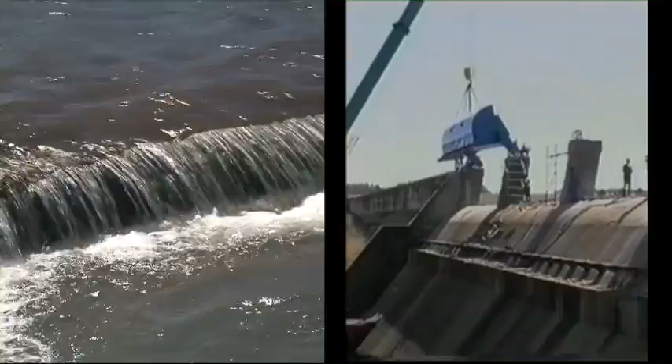I'm Peter Townshend, qualified civil engineer. I graduated in 1969 from the University of Natal. Most of my life has been spent with consulting engineers, doing a variety of work, a broad-based experience from civil and structural work. But more recently, over the last 20-25 years, I've had an interest and a passion for water and for water control. And through that passion, we've developed a range of automatic water control equipment, which is unique in the world and developed in this country.

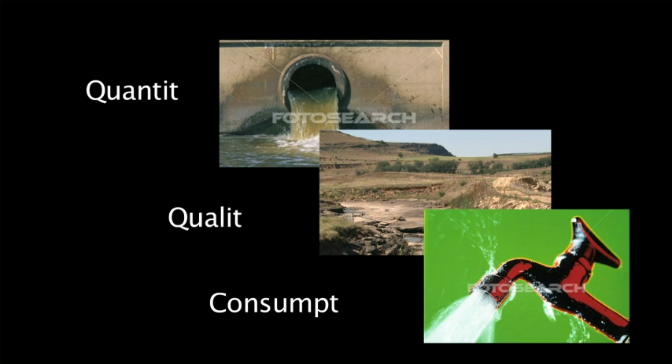Well, Johan, that's a very controversial subject because we are in a state of crisis, impending crisis, and it's only recently that the government and the public have realized this and are taking steps to it. Generally, I could refer to our water condition as the 3 Ks, being phonetical Ks: quality, quantity, and consumption are the 3 main areas that we need to focus on, and areas that we have crisis in this country. South Africa is not really a water-rich country.

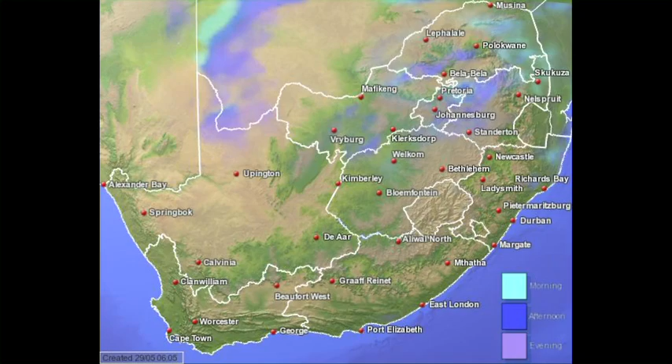We have an average rainfall of less than 500 millimeters across the country, and the water that we do have is usually in areas where we don't need it, and vice versa. So consequently, we are a country which has diverse rainfall going from west to east and to the coast, and we find that in the dense industrial areas where the demand is the highest is usually where we don't have sufficient water.

There's an increasing demand in South Africa for water. This is obviously due to increased population over the years, and the government's policy, correctly, is to try and provide clean, safe water to all the inhabitants of this country. That's going to be a large demand on our water resources. Then, in addition to that, there's an increased standard of living, and with that comes an increased water usage.

From the very rural people who have to go and fetch their water from the local stream, they are probably the most efficient water users, to the affluent environments that we have in urban areas where water can be irrigating on the lawns day and night. So with the increase in wealth and living conditions goes the increase in water consumption. In addition to that, our industrial and mining industry is increasing, and that consumes a considerable amount of water. And then food production.

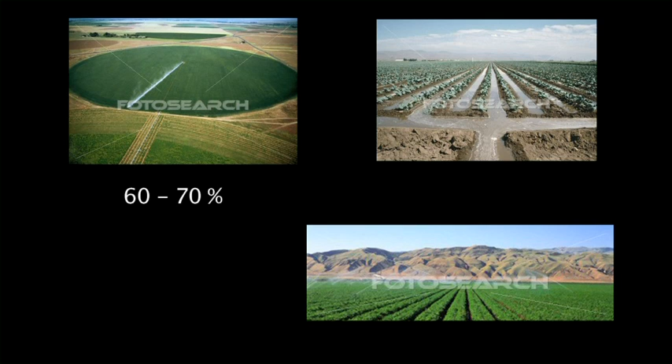About 60 to 70% of our water is used on irrigation, and that needs to be done to feed an increasing population. So our demand is increasing all the time, and in order to meet this demand in South Africa, our authorities need to look at a variety of mechanisms. One is to build more dams. It's not always possible to build dams where they're needed because of the water resources, but there are a number of dams that are being planned and are under construction, like the De Hoop Dam in the Limpopo province.

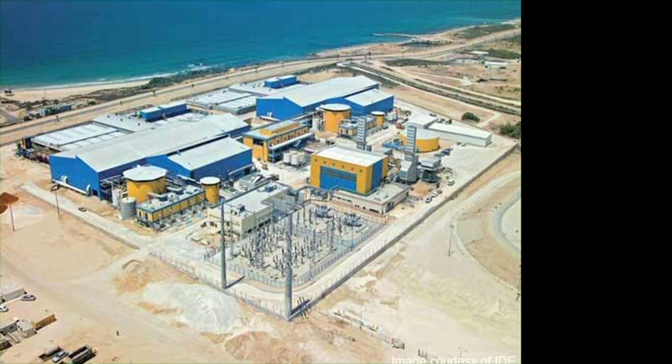Then there are interbasin transfers, such as from Lesotho into South Africa, which is also a cross-border utilization of water. And then more recently, and more importantly because it's needed, is desalination, where we will be looking at winning fresh water or potable water from the sea. All these mechanisms will come into play, but they are expensive. There is a price to pay for water. If you don't have water, you have to pay for it.

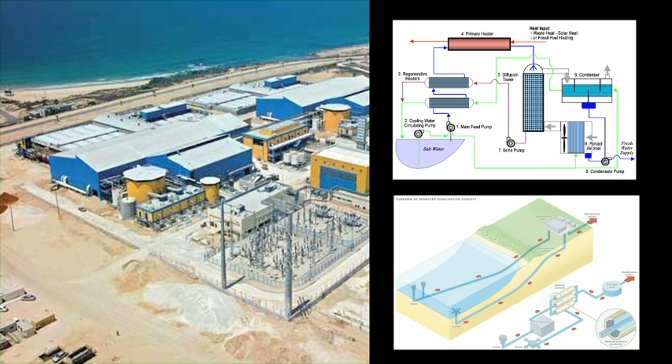Yes, there are figures that have been bandied about, ranging from 2 to 5 rand a cubic meter, depending on the size of the desalination plant. It is very energy consumptive, although the more recent technology of reverse osmosis does have a recovery of energy. But nevertheless, it is a costly exercise. It is a costly process to get water from the sea, more so than water from dams and from rivers.

What skews the public perception at the moment is up here in the Gauteng area and the Highveld area. We've had good rains this year, extremely good rains. And it's very hard for people to imagine that we're going to have a water shortage. However, in the Eastern Cape, Port Elizabeth area, they are in the grips of a dry period. Their municipal dams are only sitting just over a third full, when they should be substantially fuller than that. And so that is the problem in this country, that we have this difference in areas, some very wet, some very dry.

In this area, which is the hub of the industrial area of South Africa, it is predicted that we are running into a problem in that we are already exceeding the capacity of the Vaal River system. And phase 2 of Lesotho, which is scheduled for 9, maybe 10 years' time, will deliver more water. But in the interim, it's very possible that we will run short of water. So consequently, the focus has to move onto how to reuse wastewater, how to save water, and how to plug our losses as much as possible.

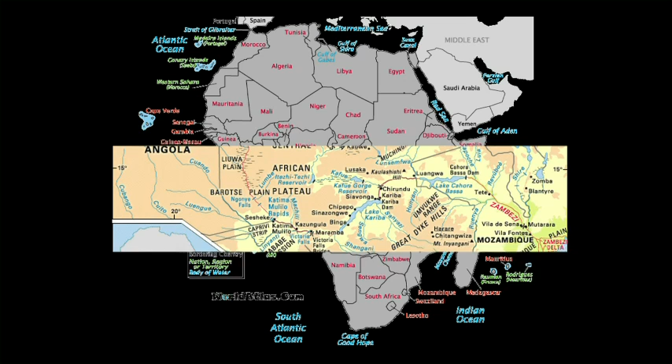But generally, it's accepted that maybe in 15 to 20 years' time, we could be short of water in this country. And we may have to look north to our northern countries where they will get more water. As far as global warming is concerned, the pundits, the climatologists, are predicting that we get less rain for areas south of the Zambezi and more rain for the areas north of that. And already there are indications in some of the rainfall and runoff figures over a long period of time that we are getting less rain, and in addition to that, more severe rainstorms. So the intensity of the rains is increasing, and with it come other problems associated with runoff and floods, etc.

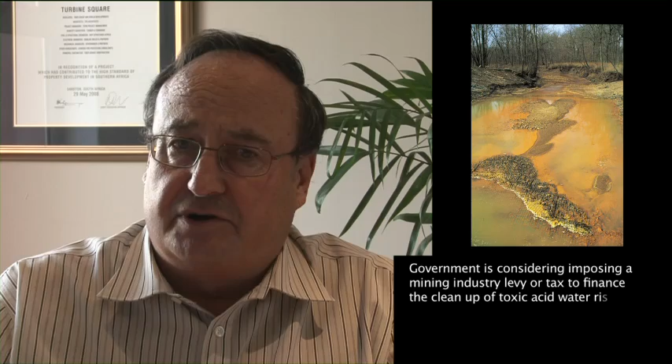The quality is constantly deteriorating, and there are essentially 3 sources or 4 sources that contribute to that. The one that is most topical at the moment is acid mine drainage, which we can talk about a little later. The other is the uncontrolled and unpoliced discharge by industry and mines into the watercourses. And this is basically due to a lack of adequate policing, which the Department of Water Affairs admit that you don't have enough people to

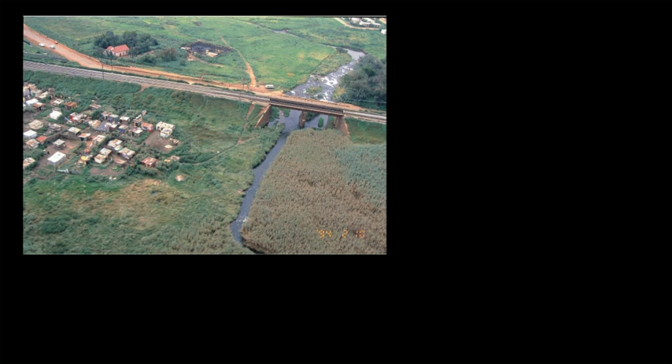police these discharges. And then the other one is informal squatter settlements, which naturally set themselves up near watercourses because that's where their water comes from. And with that, their waste and refuse and debris ends up in the watercourse, all adding to the deterioration of the water quality. And obviously, as we see blocked sewers, overflowing sewers running down the roads into the stormwater system and into the watercourses and our rivers.

So all that adds to the fact that our water quality is deteriorating and is beginning to have adverse effects not only on human health, which is probably the primary one, but also on industry. A lot of the rivers serve as the main source for irrigation, for edible crops or for deciduous fruit, and the fact that we may be using polluted water could actually jeopardize our overseas markets. It has been said that could be a case, especially in the Western Cape. So consequently, water quality is a major issue, and we need to look at it.

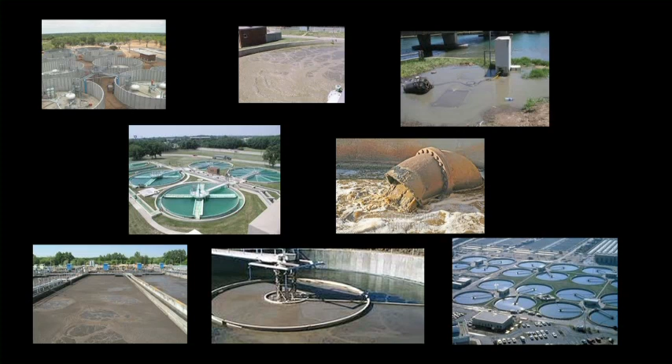We have a lot of smaller municipalities who are not able to adequately treat their sewage. Either from a lack of technical skills or whatever, they don't have the ability to maintain the treatment works in the state they should, and a lot of partially treated or even raw sewage is discharged into the watercourses.

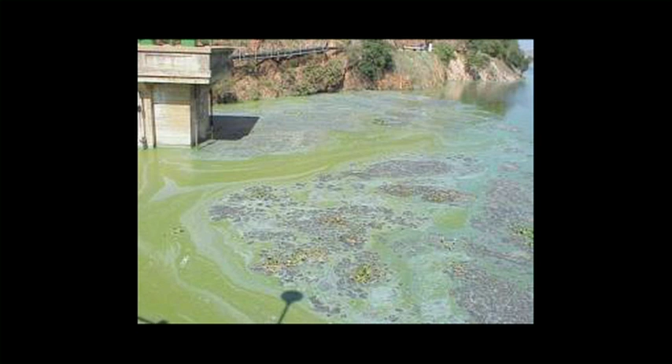Like there is for the energy crisis, we see it on TVs, there's more of an awareness of it, but there's not that level of awareness being brought to the public for polluting. There's still a lot of litter which has just been strewn around the streets, which ends up in the watercourses, which biodegrades, and adds to the nutrient load in it. And Hartbeespoort Dam is an example of maybe the biggest maturation pond in the world. So that's one aspect.

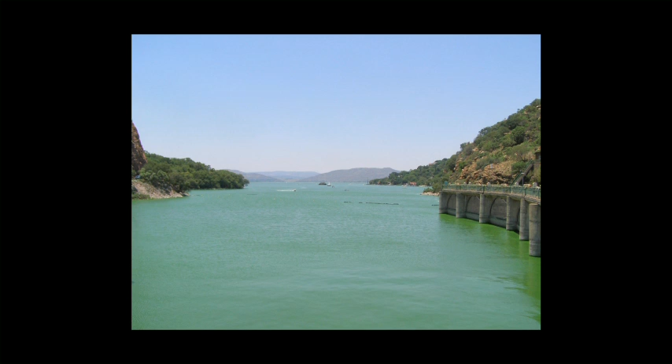But the other engineering solution that we may go for is to try and remove the mechanically operated sewage plants and go for a more natural type of treatment, such as reed beds, which work very well at treating the water to the standard where it can be released into the watercourses. It's a non-mechanical process, and I believe it has a lot of potential in this country. However, we need to get the municipalities' mindset along the lines of using a natural way of treating sewage.

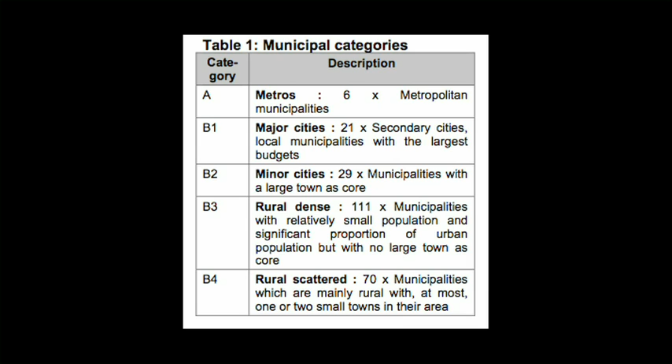Now, it's general knowledge that the municipalities have losses which may vary from as little as 25% up to 60 or 70% or higher. Some of them don't even know what their losses are. And this is valuable water which is just being returned to the watercourses and is being lost. So we need to recover and reduce those losses.

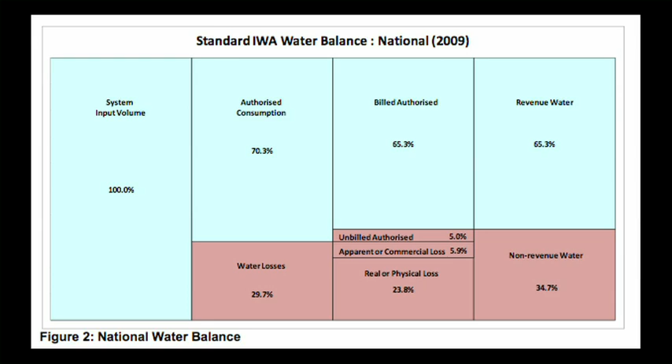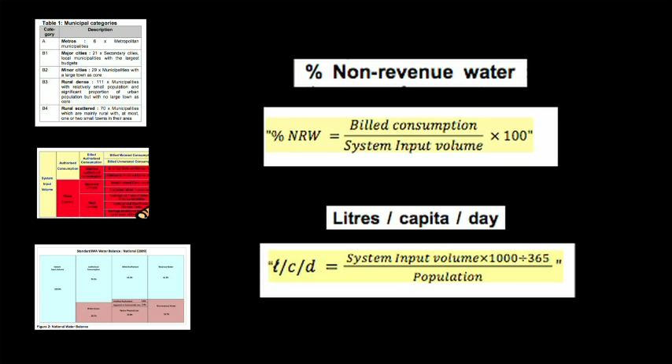If we were able to just reduce losses in the Gauteng area, we may be able to span the time before phase 2 of the Lesotho Highlands Water Scheme comes into operation. So we need to spend a lot of money on it, and already the Gauteng provincial government will be spending more than 50 to 100 million rand on improving existing infrastructure, water supply.

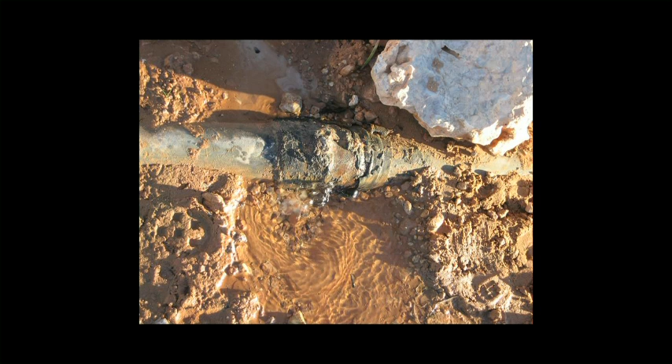The losses can be attributed to old pipes and valve systems in the cities. A lot of them are buried under major roads and in CBD areas which are difficult to get to. It's not an easy thing to replace those. In addition, some of the pipe network systems operate under unnecessarily high pressures, and even a pinprick of a leak under high pressure will lose water. Whereas if you can reduce that pressure by a few bars, that leak will reduce substantially. So pressure management is also important. There are companies that monitor this, and they're doing a good job at reducing the losses in these municipalities.

And then the other problem is insufficient skills and resources to react quickly to a burst pipe. And the public are urged to contact the municipality as soon as they see a leak occurring or a burst pipe. Overflowing reservoirs is another area of loss, where the control valves are not functioning properly.

And then the old problem of illegal connections to get water for free. As it has been a problem for electricity, so it is with water. There are a lot of illegal connections. And the municipality of Durban is even offering a period of grace for people to come clean on their water, because they will be found out and they will be penalized. So they need to be reduced as well, because that's an under-recovery of costs, of the expenses. And without those recoveries, those people who are paying will be paying more for water.

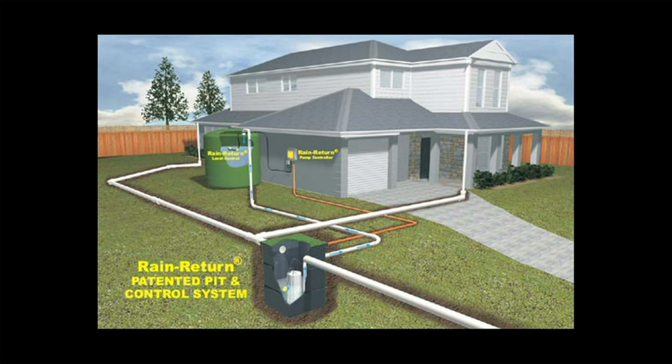Because of our impending crisis for water supply and water demand, we as the public should take certain measures to reduce our consumption or reuse water as much as possible. Rain harvesting, which is becoming more fashionable now, which is essentially just the storage of rainwater, is an effective way of doing it, and more companies, new buildings that are going up, green buildings, incorporate the principle of rain harvesting. On private properties, we should try and harvest as much of the runoff from our roofs as possible.

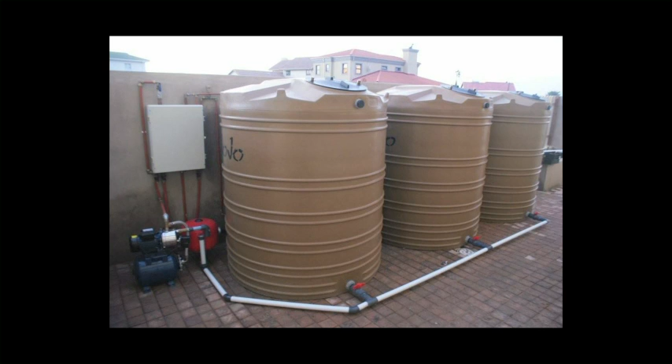The other is to use grey water from the bath or the wash hand basin, and either store it or lead it directly onto your lawn or garden as a water saving measure. There are some companies which collect that, treat it slightly and put it back into the cisterns, so that becomes the flushing water for the toilets. We need to get away from this practice of washing down driveways and hard stand areas. It's an easy way of doing it, but it's wasting water. We need to do it the hard way and sweep it.

We are quite extravagant in the way we use good, fresh, clean water to irrigate our lawns and so on. And there are a number of ingenious methods out at the moment, even planting gardens with drier species, more indigenous plants which take less water. There are a lot of those around as well, but we need to be aware of the value of water and start reducing that.

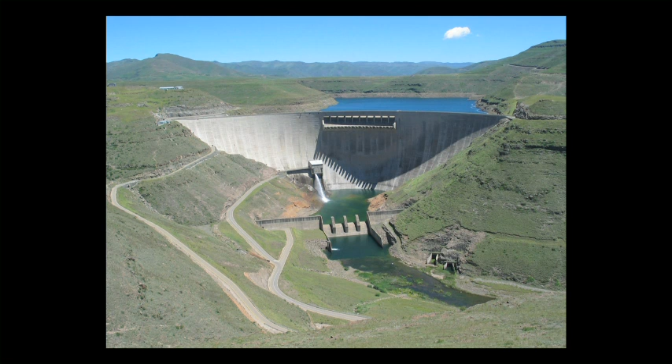Well, to build a new dam is costly and very time consuming, but probably more so, it has a lot of environmental problems associated with it. It's probably easier to raise a dam by a couple of meters to win between 15 or maybe even 50% extra capacity in the dam, and if you do that to 3 or 4 dams, it's effectively the same as building one new dam.

The majority of our dams in this country are probably more than 40 to 50 years old, or even older, and they have accumulated sediment. On average, about 25 to 30% of our total storage capacity has been lost to sediment. And so that is an additional loss on our water supply. And just to compensate for the loss in storage due to sedimentation, we should look at raising our dams.

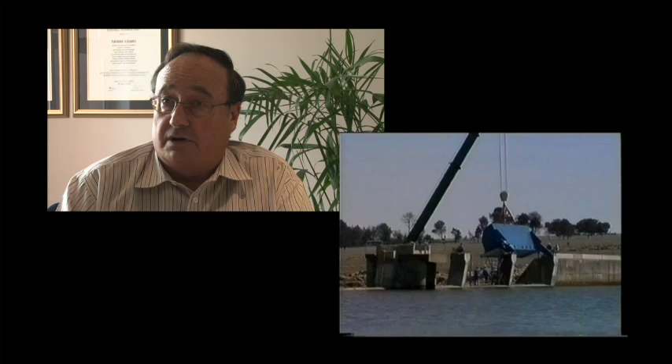In raising an existing dam conventionally, there are environmental issues because you invariably require considerable quantities of fill, and that means quarrying, it means increased transport, and the environmentalists always find a way of increasing the negative impact of doing such a thing. Whereas installing gates, the gates are manufactured in a controlled environment, in a workshop, with quality control, and the site involvement is purely one of installing them on the dam. The environmental impact is minimal compared to conventional raising. However, I do re-stress that if you can get away with increasing the capacity with an ungated spillway in this country, we should do it.

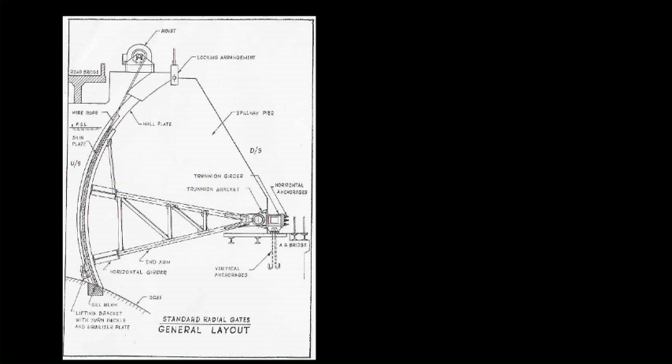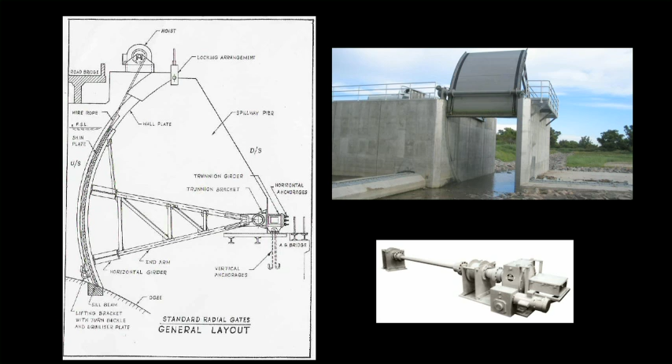The main reason why there has been somewhat of an adverse tendency to go for gates on spillways is because traditionally the spillways have utilized electrically or mechanically driven gates. Most of them are radial gates, but there are also vertical roller gates. And some of these are stuck, they're just not working anymore. That can be put down to a number of reasons: corrosion, but generally lack of maintenance. And because of that, these gates, when they're required to work, don't work. They're either stuck or they just don't work. They haven't been maintained.

So the safer way is to try and build a dam without gates. However, there is a new generation of gates which are automatic, which don't require any electrical or mechanical input. And where the dam conditions dictate that a gate's required, we should look at automatic gates because it eliminates some of the problems associated with electrically driven gates.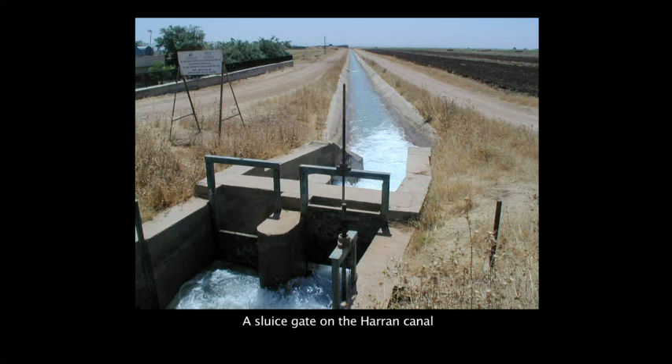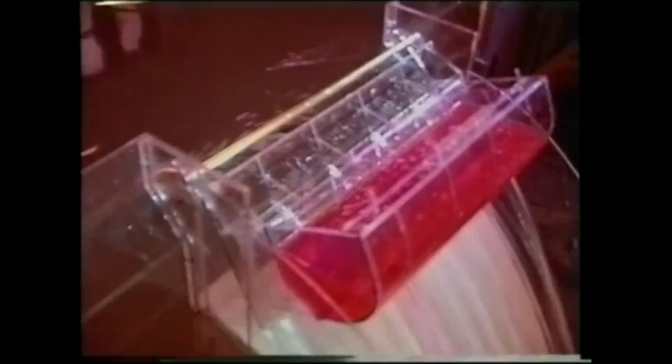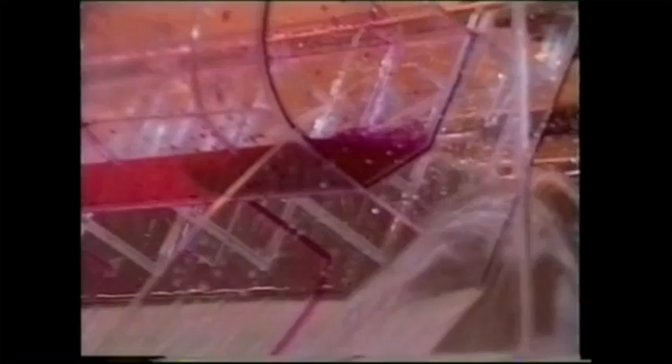Fully tested by independent universities, our TOPS gate offers a quick and affordable solution to increasing water level in dams, from as little as 0.75 meters to a whopping 6 meters. The gate will open automatically as the water level rises in the dam when a flood passes through it, and will close again automatically once the flood has passed, retaining the increased water level. Easy, straightforward and uncomplicated. That's the TOPS gate solution.

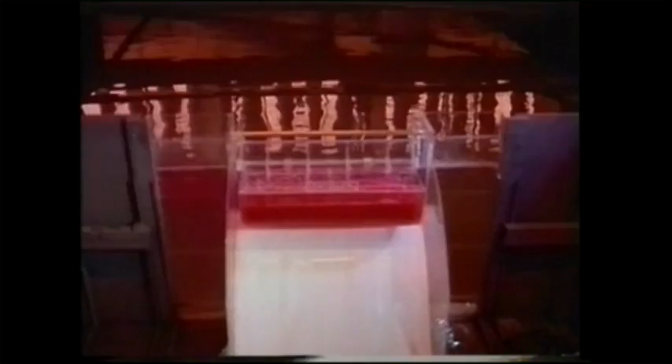The gate is closed while the water level in the dam is rising. Note that the water level in the ballast tank rises as well. The weight of the ballast tank will ensure that the gate remains closed right up to the full supply level of the dam. Should the water level rise above increased full supply level, water will overflow over the front closure plate while the gate remains closed.

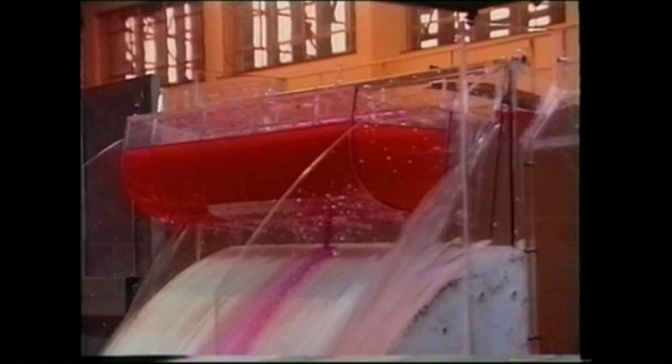As the upstream water level rises even higher, the gate rotates upwards to pass the flood water. As the flood recedes, the gate rotates back to its fully closed position, with the dam now filled to its new enlarged capacity provided by the celebrated TOPS automatic spillway gate.

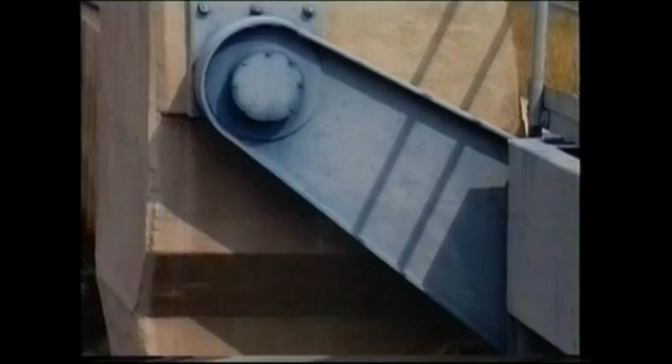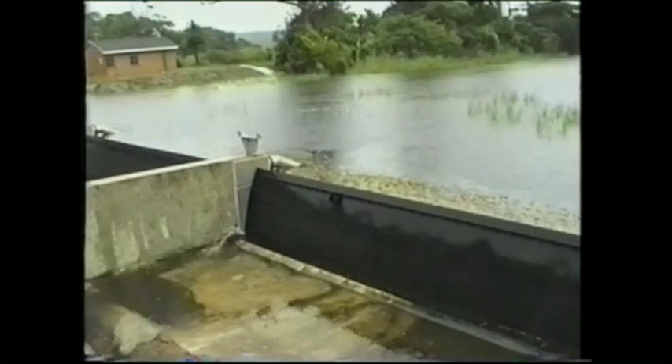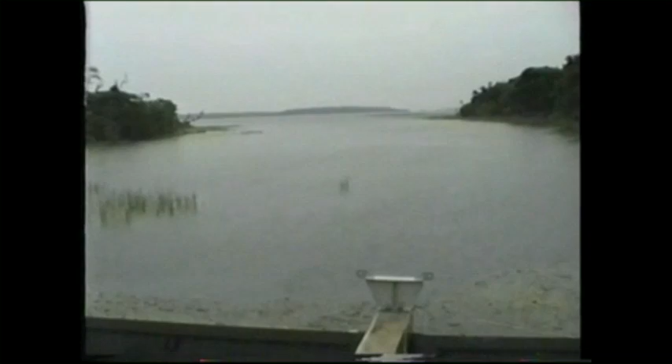This gate is installed on the crest of a weir or dam to implement storage and flood control. It provides an economical increase in storage capacity without raising the dam wall and without increasing the maximum permissible flood level. Debris control, screening and scouring are all effectively and efficiently handled. Under normal conditions, the buoyancy tank acts as the gate, which retains the increased water level.

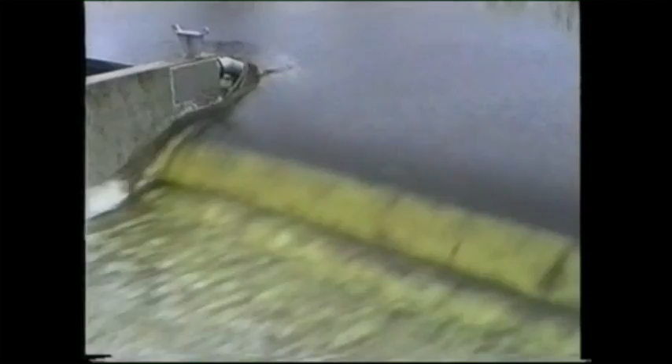With floodwater rising and inflow into the weir, the weight of water will rotate the crest gate downward to allow an uncontrolled flow over the spillway. During peak flood conditions, the crest gate will automatically move to its fully submerged position to allow maximum flow from the spillway. Finally, as the flood recedes, the buoyancy tank will empty and the gate will float at its closed position to retain the increased supply level.

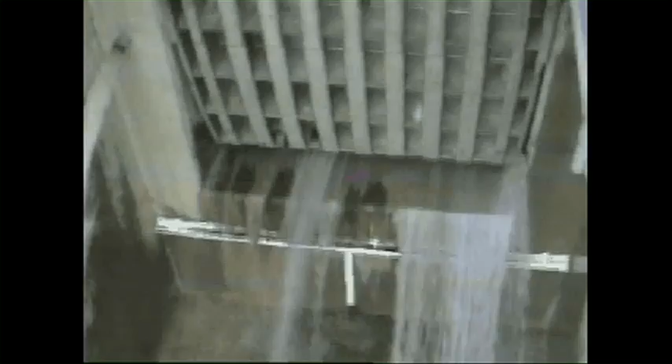Our scour gate is installed in the lower levels of a weir or dam to provide scouring, flood control and water regulation. In a canal system, it will ensure automatic rejection of excess flow as well as sediment.

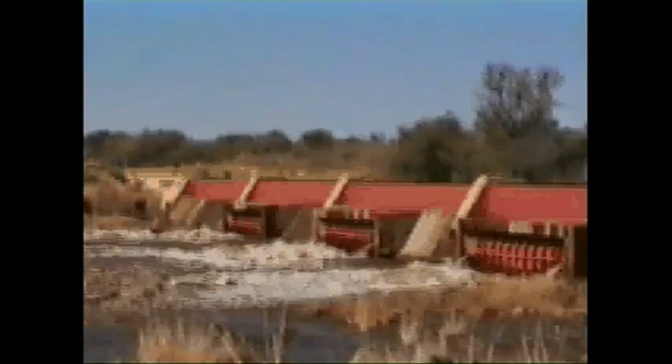Designed to control a constant but adjustable downstream water level with a widely varying level upstream, this automatic diaphragm valve has a proven accuracy of control better than required in normal practice. The valve can be used in diversion works, reservoir inlets, river offtakes, dam outlets and canals for water apportionment in standard upstream variations from 0.3 meters to 40 meters. It can be manually operated and locked to prevent tampering by unauthorized persons.

As far as the history of the gates and the water control equipment is concerned, this can all be attributed to Mr. Laurie Turner, who back in the 1960s, a farmer in the Eastern Cape, a very innovative man, had the Orange River fish canal system flowing through his farm and wanted to irrigate from it. But he realized that the water needs to be controlled and made inquiries with the Department of Water Affairs as to what equipment they used, which at that stage was purely manual slide gates.

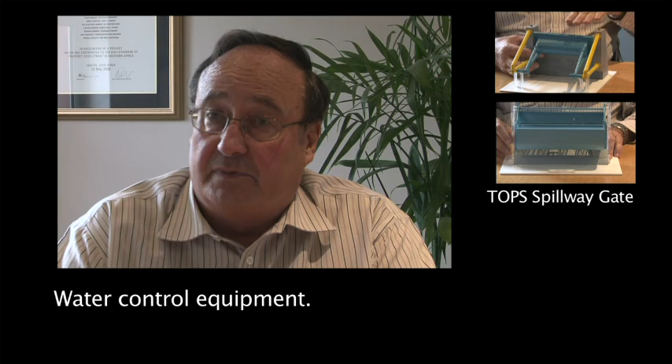He researched overseas equipment. There are some French products which he looked at and thought he could do better. And consequently, with some introduction from an overseas person in America, was able to develop the diaphragm valve. Further than that, the weir across the Little Fish River would silt up, and did silt up into the canal, the offtake canal, to the point where it was actually jeopardizing the whole irrigation scheme. And he then consequently came up with the Scour Gate and the Crest Gates.

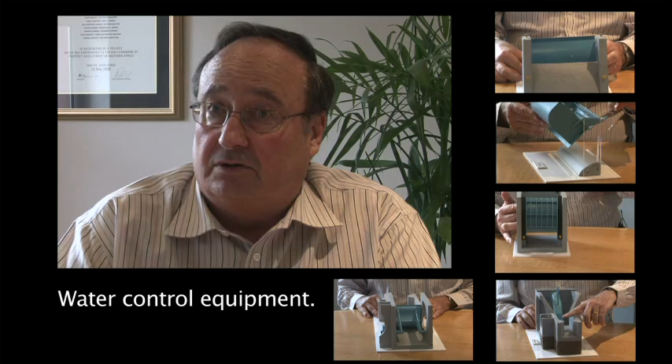So all these gates have been developed in South Africa by a person with no technical background, just a very practical person. That technology was then handed over to engineers, and myself, together with Brian Middleton, were one of the earlier pioneers of the equipment. This goes back to the 1960s. The first regulating gate in Patensie on the Gamtoos irrigation scheme was installed in 1967, so you can see it goes back a long time, and it's still working today. It's only been taken out once for a recoating, but it's still working perfectly well.

And we've just added a bit more engineering to it, but the concept is simple. It's designed for African conditions, where it can stay in a remote area. It can handle the climatic conditions, the floods, the hot weather, and the debris. A feature of this equipment is that it has been designed to handle the debris loads that we get in our rivers and irrigation schemes, and the dirty water.

And so consequently, it's designed for Africa, but the technology has found a lot of interest in other parts of the world as well for irrigation schemes. And we now have equipment installed in Africa, in Uganda, Zambia, Zimbabwe, Swaziland, Namibia, and more recently Peru, as well as Crest Gates in Australia. So the equipment has found a considerable amount of interest around the world.